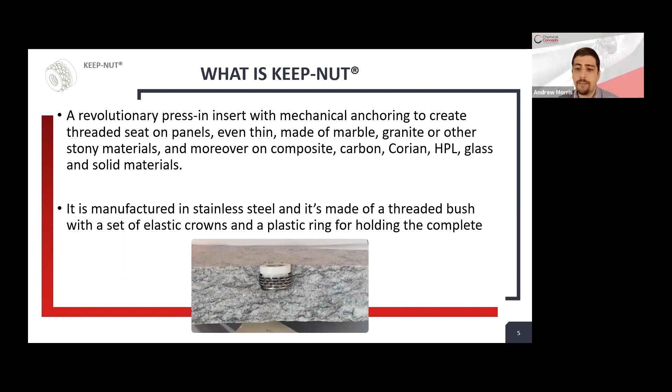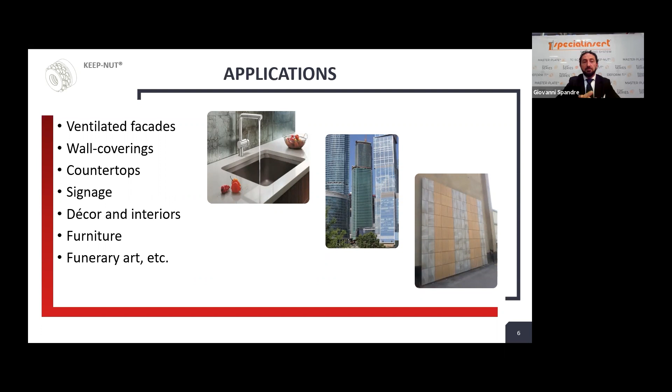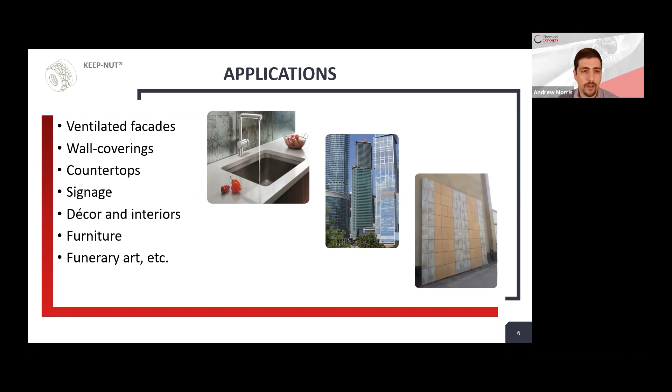Keep nuts are made of stainless steel and nylon, and come in a variety of sizes and configurations. They were designed to be used on porcelain and natural stone for ventilated facades, but some other common applications include vertical applications in wall coverings, signage, decor, and other interior parts and furniture. Tabletops are really common, as are armrests and other furniture parts. As you can see on the screen here, keep nuts work in a wide variety of materials.

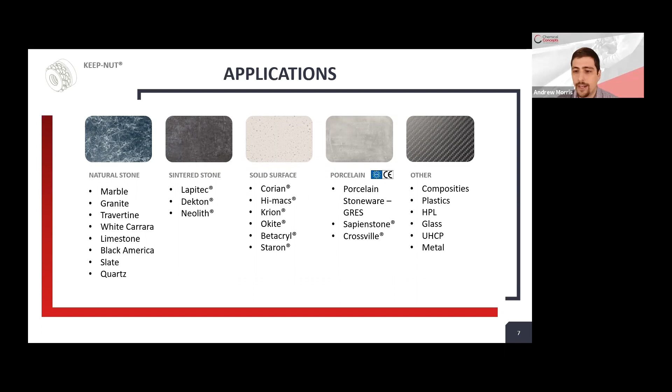The thing to keep in mind is that the keep nut is best suited for very hard and dense materials. I wouldn't recommend the keep nut for soft plastics such as cellular PVC or soft woods, but it works very well in natural stone, sintered materials, and porcelains. There are also other products such as composites, plastics, phenolic core products like Trespa, ultra high performance concrete, and even solid metal sheets if they're 8 millimeters thick or more.

So how do you install a keep nut? The first step is to drill a straight cylindrical hole using the correct size drill bit. Keep nuts come in different sizes, but the diameter of the hole is always consistent. You're looking for an 11.8 millimeter hole, and we'll talk about the drilling methods in a minute.

Next, you'll use a very simplistic hole testing tool. We call this the go, no-go gauge. You'll see this in the live demonstration as well, but one side says go, the other side says no-go. If the no-go side fits in the hole, then the hole came out too big. There are also depth markings on the side for the most commonly available sizes.

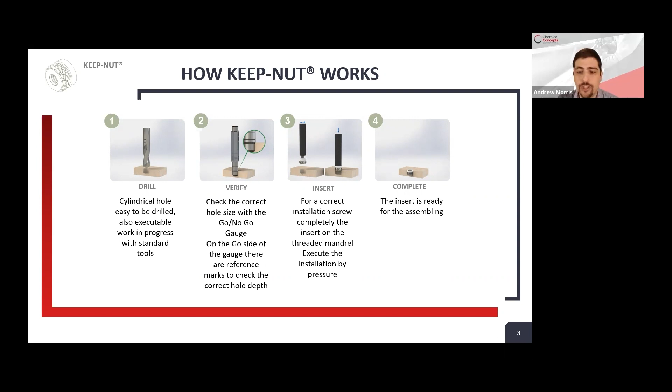Next, there's a setting tool, which is just a plastic rod with a threaded rod on the end. You simply thread the keep nut onto the tool and punch it into the hole with a rubber mallet. At this point, the insert is ready for use.

As for drilling methods, the keep nut works great with automated drilling methods, and that's usually preferred. If you're working with stone or masonry material that requires wet drilling, you can use a CNC router for stone. If you're using solid surface, HPL, or materials that fabricate more like wood, you can use CNC routers intended for wood and plastics. In this case, most often I see people using small router bits, say 1/4 inch, and then programming the machine to drill in a spiral to end up with a hole that's the correct depth and diameter.

With wet drilling, diamond bits are usually only designed to go up and down, so you want to use the correct size hole. We sell 11.8 millimeter drill bits, and they're relatively inexpensive, around $40 depending on what quantity you buy. You can get hundreds or even thousands of holes out of one bit depending on what material you're using and what your setup is.

If you're looking to use a manual tool, there are options as well. For solid surface, HPL, and other materials, you can simply use a lithium-ion drill with the correct size drill bit. We also have depth stops available, so you can drill repeatable holes very easily. If you're working with materials that require wet drilling, we have the KDM series drilling machines. These have a vacuum foot that holds the drill at a perfect 90 degrees. It can suction down to even the rough side of the stone, and it can drill a hole in granite in 10 to 15 seconds.

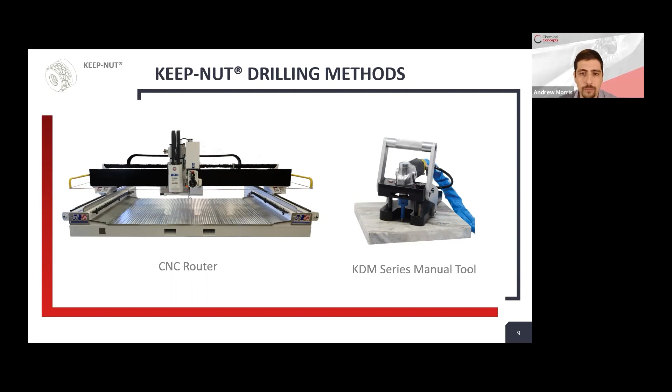So at this point, we're going to stop for a minute and show you this brief video, which I think will give you a better picture of what I've just described. So let's watch.

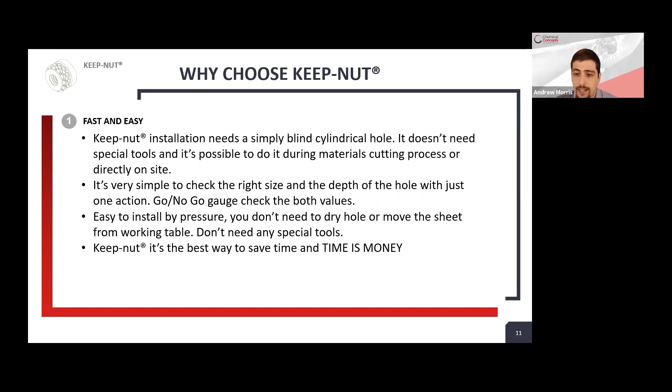We've had many of our biggest customers do their own cost studies, and in every case they come back and said that the time and labor savings were really significant.

The 2 crown is far and away the most popular size. This version is best suited for undermount sink applications, 12 millimeter materials and above.

Then you move up to the 4 crown types if you've got heavier duty applications. This is recommended for cladding or vertical surfaces where you have 2 cm or 3 cm granite, or if you need higher strength for softer materials such as soft marbles and high performance concrete, which is typically softer than stone materials.

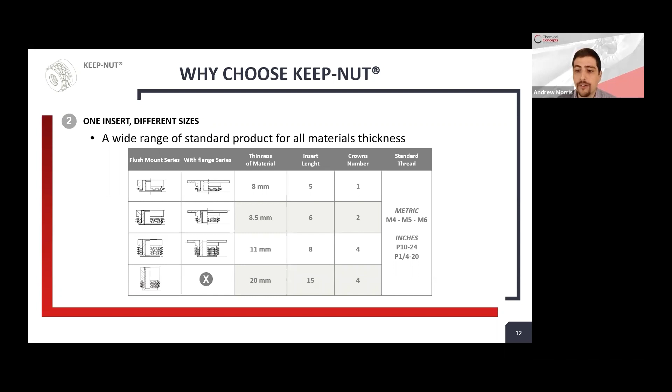In stone fabrication, it's not uncommon to do 3 cm granite on Monday, 2 cm marble on Tuesday, 12 millimeter porcelain on Wednesday, and 8 millimeter Dekton on Friday. So from a quality and process control standpoint, it's hard to have 5 different systems for 5 different materials. Here you can have 1 product and 1 process that works with a lot of different surfaces.

Next is safety and security. In Europe and many other countries that use the standard, the KeepNut has ETA and CE certification for porcelain. We also just received, which we're also very excited about, the test results for the ASTM standards for North America. This was performed by the lab at the Natural Stone Institute.

So we now have ASTM tests for different types of stones. We did a hard stone, a soft stone, a medium stone. You'll see those results in a couple slides. We have several porcelain materials, including Sapien Stone, and we're working with other surface manufacturers such as Cosentino and Lapitec and others in order to get even more test results on more materials.

The KeepNuts, as we mentioned, are stainless steel, so they're suitable for interior and exterior applications. They're also fireproof. The 1 plastic component is self-extinguishing, and once it's installed, it does not affect the performance or the strength of the fastener.

It's also a totally mechanical system, so there are no variables in terms of proper mixing of the adhesive or whether or not you get good adhesion or the adhesive performed correctly.

And lastly, the KeepNut is designed with a stop at the end, so it is not possible to over-thread the KeepNut. I've heard of issues with other systems that if you over-tighten the bolt can keep moving and you can actually crack the whole panel if the bolt goes too far.

With the KeepNut, the bolt will just spin if it's over-tightened, so this kind of failure is not possible.

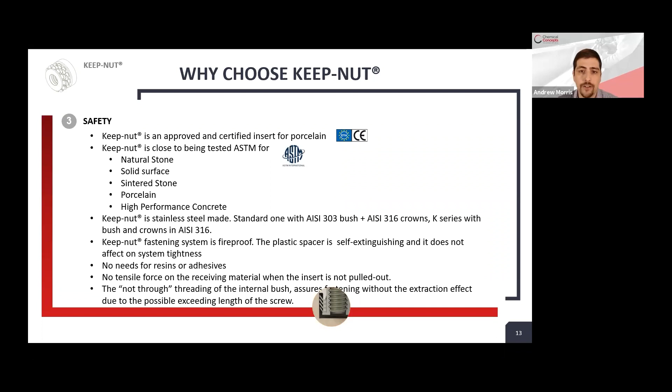The keep nut is also flexible and easy to work with after installation. When using the flush mount, there's nothing sticking out above the surface, which is great for storage and transportation. The fact that it's flush opens up possibilities for using any type of hardware or bracket.

Other anchors require a specialized bracket to accept the part of the anchor that stands off from the material. But with the keep nuts, whether it's hardware, a hinge, a bracket, or a clip, the possibilities are endless.

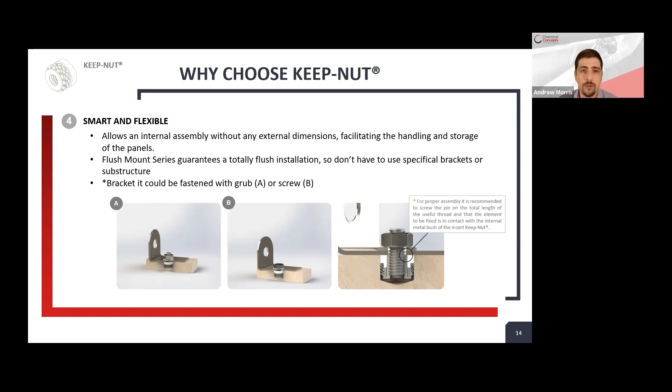This is why option A is usually recommended. You use a threaded rod, which can be whatever length you need, plus a separate hex nut. That way, you're guaranteed to use the entire usable length of the threads of the keep nut itself, and the hex nut can be adjusted to accommodate whatever thickness of hardware you're using. You don't need different screws for different thicknesses of hardware.

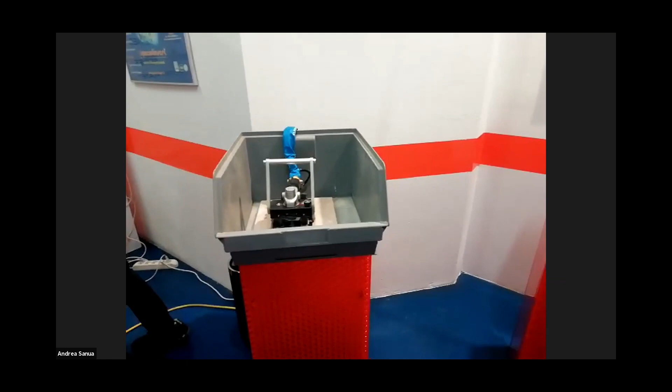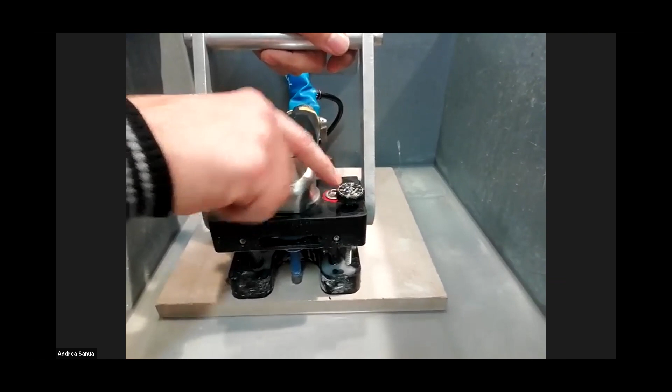Hello everybody again. Now we will do all the tests and steps needed to perfectly install a keep nut. The first step is drilling. We put the material under the drilling machine, and we have an adjustment to set the depth of the hole according to the keep nut model. Now we perform a simple cylindrical blind hole.

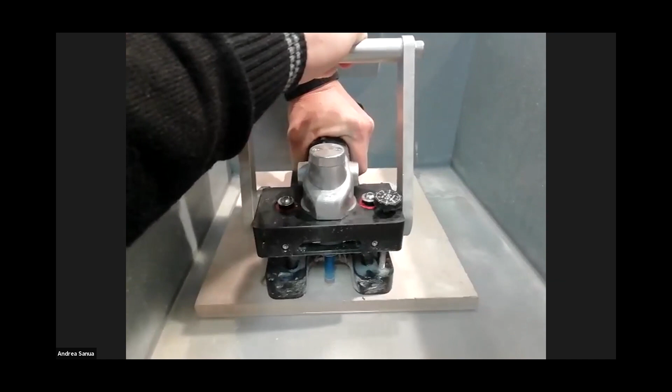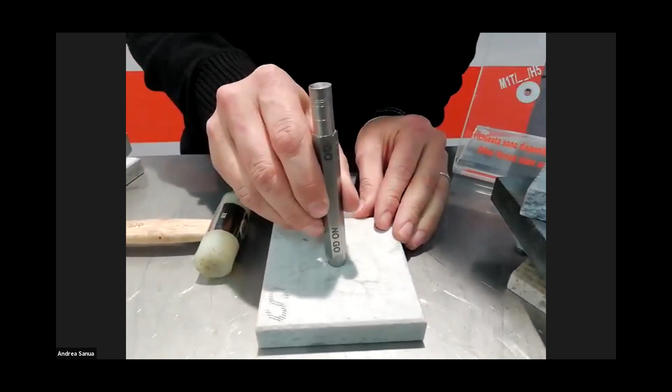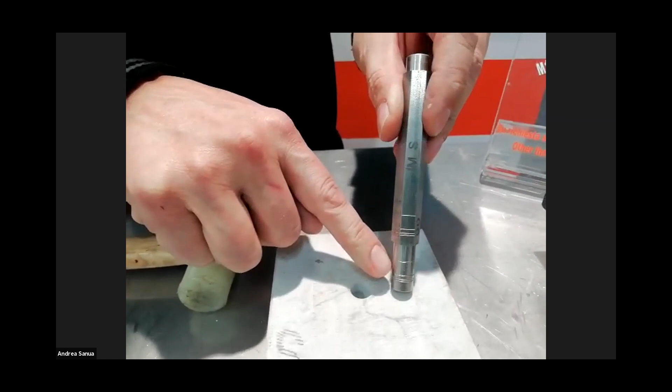Once the hole is done, we check it with the go, no-go gauge. First we put the no-go side and make sure it cannot enter the hole. Then we try the go side and check that it can go in up to the indicated level according to the keep nut model. In this case, it's the H8.5.

When everything is correct, we fix the keep nut under the punch and hammer it into the hole. That's all. Now the keep nut is installed and we can go fix it in our structure.

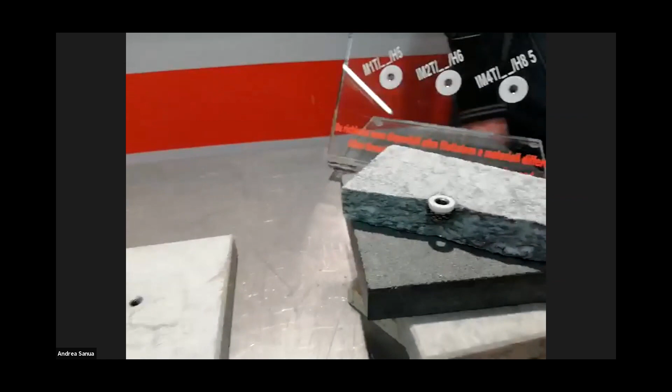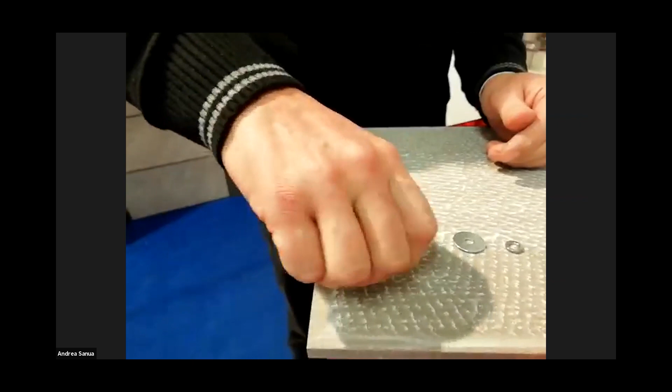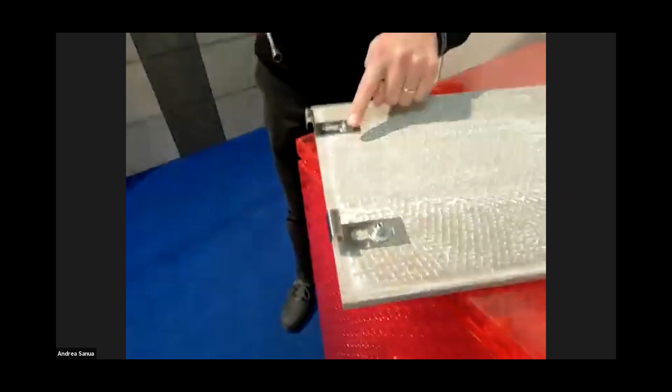In this case, it's a system for facade that we apply with the grub screw. We simply screw it in, put the washer and spacer, and the nut, and just tighten it. Our tile is ready for installation in the substructure, for instance of a cladding facade in this example.

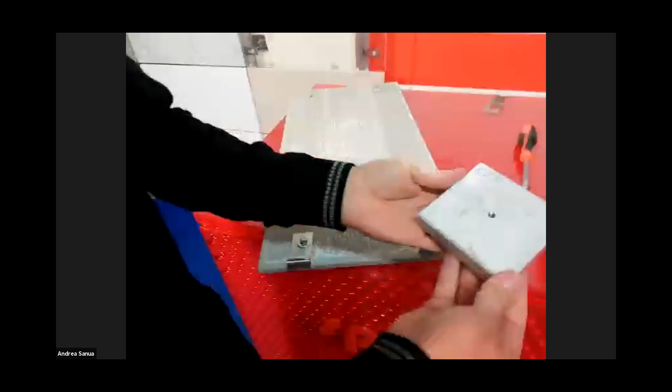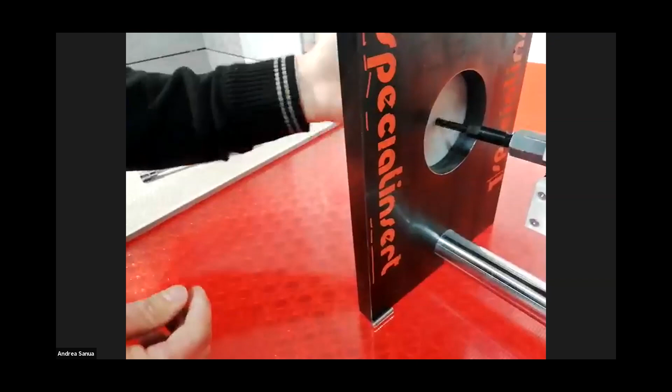And that's all, the work is done. Now we will perform a pull-out test on a sample of keep nut installed in marble. We fix it in the pull-out test machine. Please be aware that the result is displayed in kilogram force, which is equivalent to 2.2 pounds.

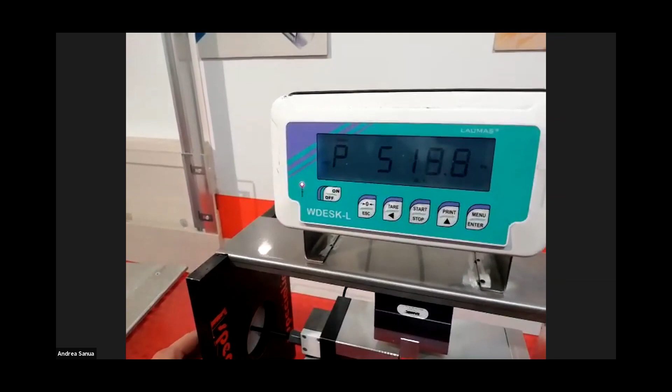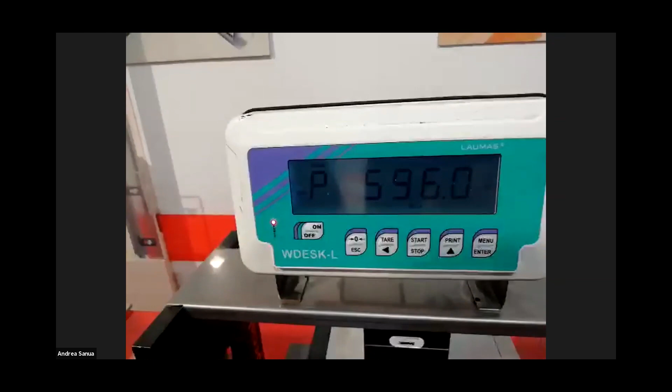It goes closer to 600 kilos. Wow, that's pretty good. We can say the result is definitely appreciable.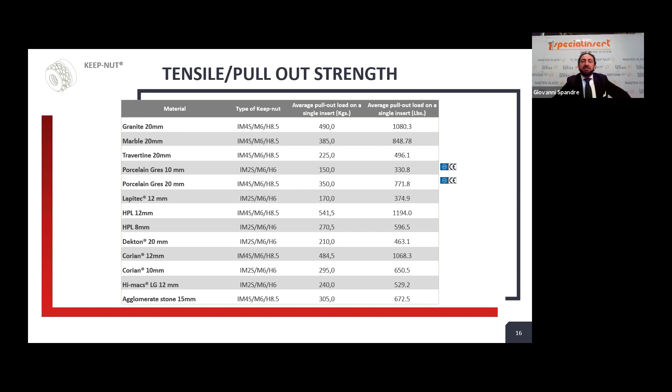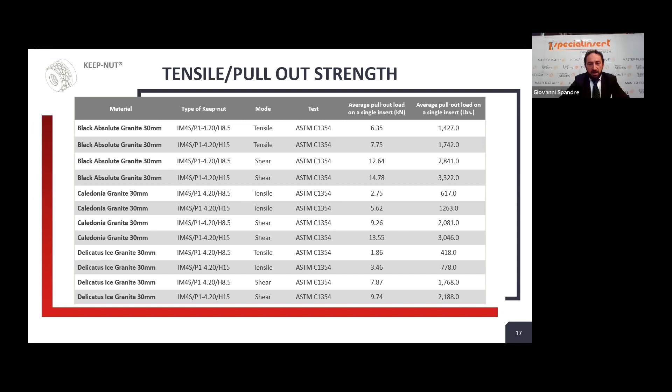In the next slide, we have the same kind of results obtained at the National Stone Institute attending the test for the ASTM. As you can see, you have the tensile and shear test results according to the ASTM test. You can evaluate it because you'll receive this presentation after the meeting, so you can see all the values for every different material.

So let's talk now about the competitor analysis. Talking about fixing systems in a mechanical way in stony material, our competitors are all working with undercut.

Undercut means you have to make a very complex drilling process. You need specific drilling tools. You need specific check tools that in most cases are very tricky to use. And you have to install the fastener before shipping the tiles to the workplace, because they're also working with an external dimension that can give you many difficulties during packaging, especially if you have to ship it very far from your workshop.

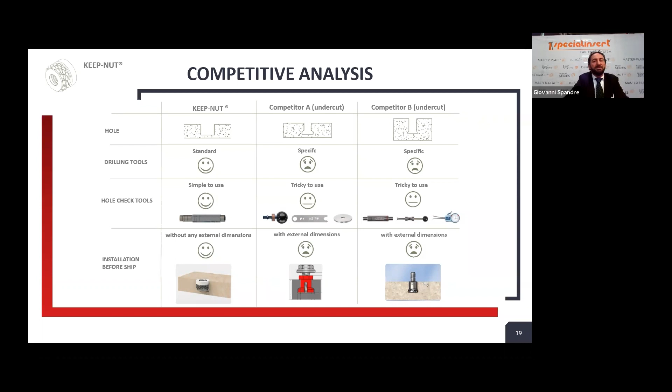Talking about the undercut process, first of all we have the need of a specific drilling machine with an eccentrical rotative axle. Then you have a very expensive drill bit that costs 6 to 10 times more than a standard cylindrical diamond drill bit. Then the drilling time is very long, on average twice as long as a standard cylindrical hole.

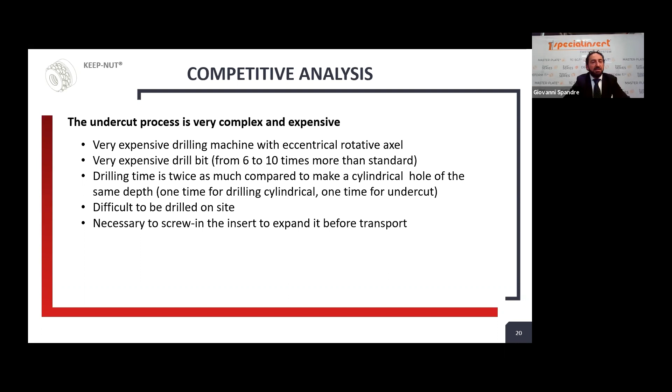It's also very difficult to do this process on site directly, and it's necessary to screw those inserts before the shipment of the parts. Otherwise, if you just insert them, they get loose during the transportation process.

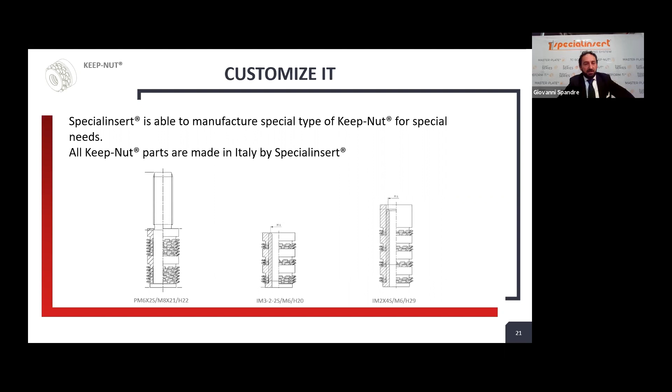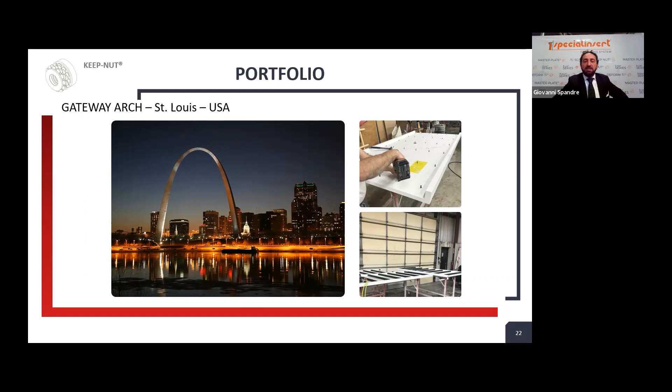Now we just want to give you a short overview of a portfolio of the most significant applications we have made recently, to give you a rough idea of how our product is used and appreciated in this industry. The first one is the Gateway Arch in St. Louis, United States, where during the renewal of this important monument, the cladding was done thanks to our Keep-Nut.

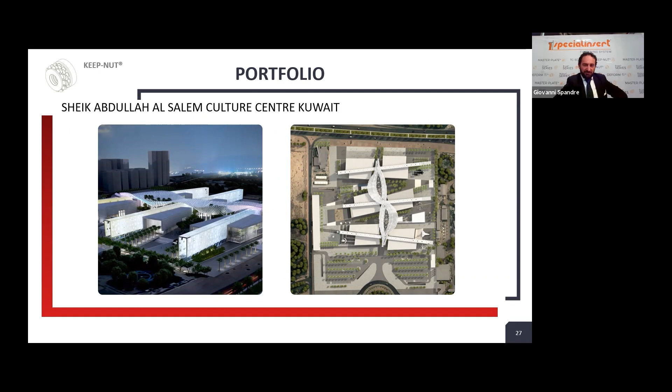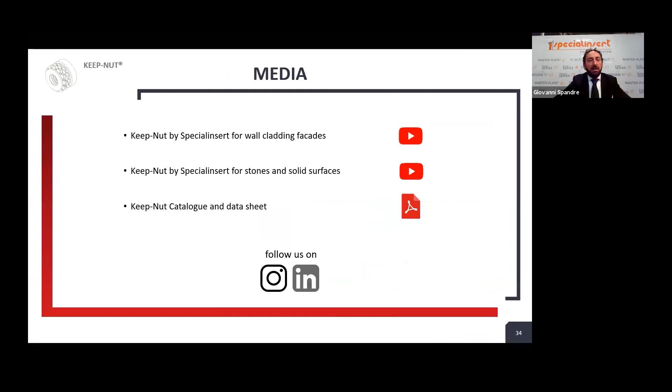ETA certification. That means European certification offices have made all the possible tests on our keep nuts on those materials. If they use the IM for instance, 2S, M6, H6 on half inches, they will absolutely have no problem, and it will not create any kind of tension inside the material. If those people are interested, we can send them the ETA certification where all is explained in detail about it.

Yeah, and I know we have some people from Porcelanosa on this call. So obviously, every manufacturer is going to have their own recommendations on what they do with their material. We'd be happy to discuss with any of their technical people whether there's any modification that is possible for their technical recommendations and whatever.

But we'd be happy to do whatever testing is needed to satisfy everybody. I just want to point out that I can't speak to Porcelanosa's product in particular, but we have done quite a lot of testing on 12 millimeter porcelain products. I want to bring up this picture here. This is actually 12 millimeter porcelain, and we did this at a workshop in Nashville, and you can see two people standing in the sinks. Each of those sinks is only supported by 4 keep nuts. We didn't have time before constructing this to even add silicone, so there's no sealant of any kind. It's just the anchors are the only thing.

I know someone might look at that and say the silicone sealant does 90% of the work anyway, but there's no silicone in this joint, and it held up fine. So I would say 12 millimeter porcelain in general is a great application, and we haven't had any issues to speak of with parts cracking or breaking.

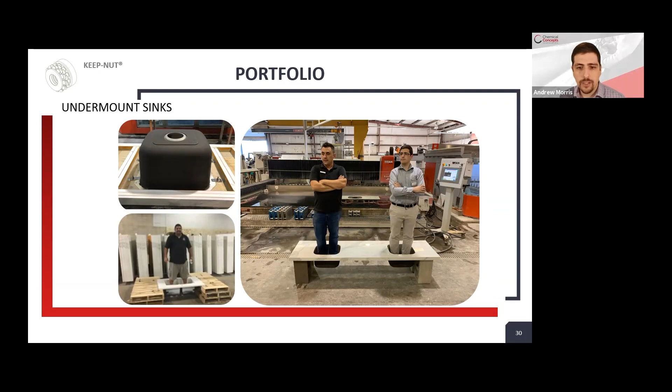Was that in here? We do. I'll see if I can navigate to that slide. There's more than what I have on the tip of my fingertips, but these are the numbers we just got from the Natural Stone Institute. Let me find those testing numbers. We've done many more tests on porcelain materials, but this is what I have in this presentation. So here's 12 millimeter porcelain: in shear we have 1,670 pounds shear strength on average, and in tensile we have 614 pounds for 12 millimeter porcelain.

We have some other porcelains we've tested, and we also have the ETA certification. The full report has testing on tensile, shear, and a combination of tensile and shear, so we've got additional porcelain numbers. I'll see if I can put our friends in Italy on the spot - I don't know what other information they have handy. Giovanni, do you have any additional numbers handy on 12 millimeter porcelain?

No, these numbers are more than correct. Yes, so that should give you an idea. And if there are any more tests you'd like, feel free to email us - we can send additional test reports if there's more data you'd like to see.

Sorry Andrew, if you can stay on this slide, we can directly answer the next question from our friend John Grossworth, who's asking about the results on UHPC. As you can see, the last four values on this slide are specifically for UHPC 15 millimeter and 19 millimeter, with the corresponding tensile and shear values.

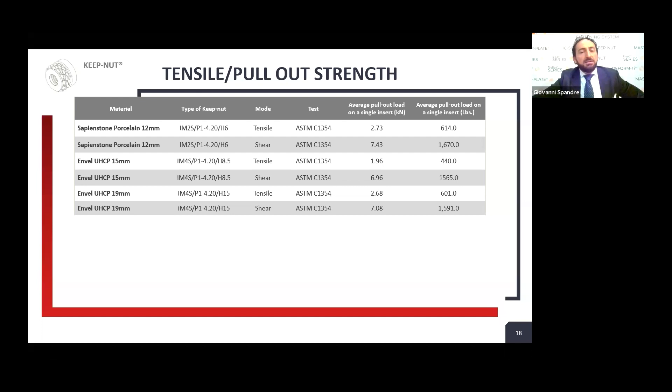The only thing I'd add is that UHPC is typically a bit softer than stone or porcelain. So to get those values, you normally have to go up to the next size keep nut than we'd normally recommend for stone, because the harder the material, basically the higher pullout strength we get.

So if you look at the granite, for instance, I was really just shocked - we just got these numbers earlier this week. For those of you who are granite and solid surface fabricators, it probably comes as no surprise how much harder black absolute granite is compared to other types of granite. Here on the black absolute with the 15 millimeter keep nut, we got 3,300 pounds in shear - the biggest number I've seen for anything with the keep nut, at least with that size.

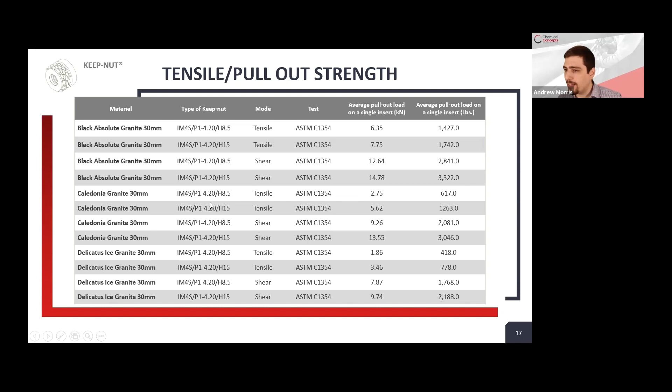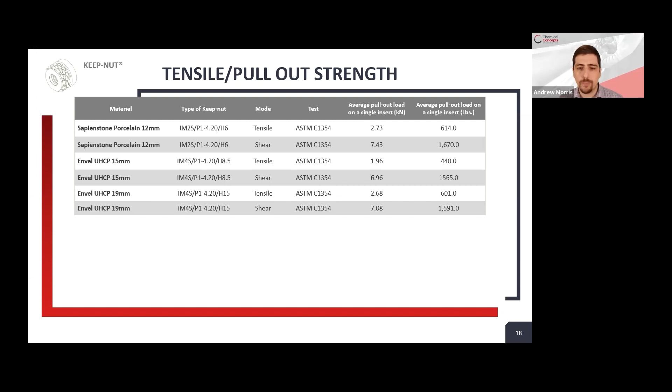So with harder materials the numbers go up, and on softer stones the numbers go down a bit. On a UHPC product I'd typically start with the 4 crown with either the 8.5 millimeter or 15 millimeter, whereas with stone or a harder material you could probably go with the 2 crown, which is our most popular. Great question.

Got a great question here from Prakash - he's asking, can we reuse the keep nut if the stone is broken or for some other reason?

No, we wouldn't recommend reusing a keep nut. Those crowns get deformed as they're inserted into the stone. Depending on what you're doing, if it's furniture, maybe the risk is low, but if it's something vertical, for whatever it costs for one keep nut, I think you'd be better off using a new one rather than risk something coming apart and falling on you. Any money you'd save by trying to reuse a keep nut, you'd probably lose in lost sleep or having to go back and fix something. So I would certainly recommend a new keep nut for any hole that you try and drill.

Thanks, Andrew. Another question here from Kurt. He asks, is there any values we have for tensile or shear when installed in steel? Yes, we have done applications on steel, on carbon fiber, on fiber resin, many different materials. Steel is very general—it depends what is meant by steel. If it's mild steel, if it's a tube, if it's drilled by machinery, if it's stainless steel, we can have a big variety of different results. If you address us with the specifics of the application, we will perform a test for you and give you the results so you can evaluate the exact performance you can obtain.

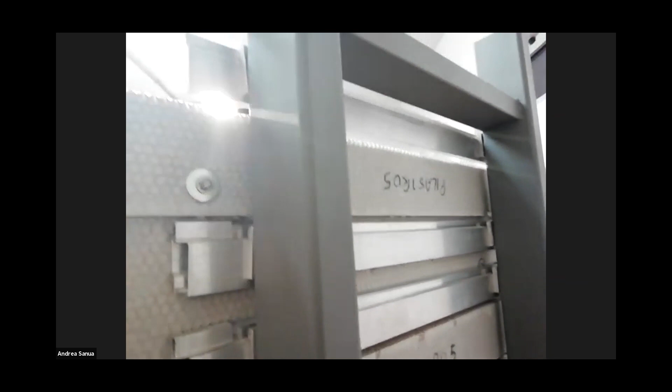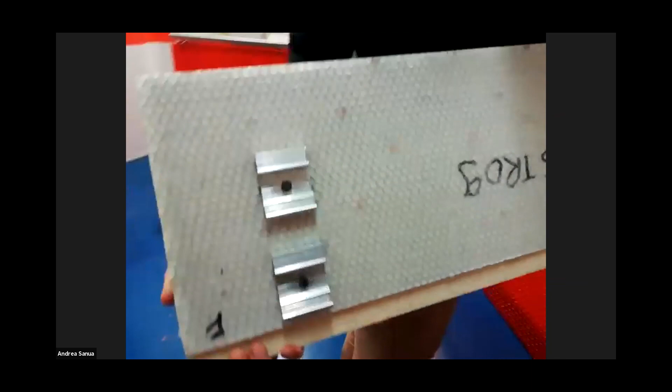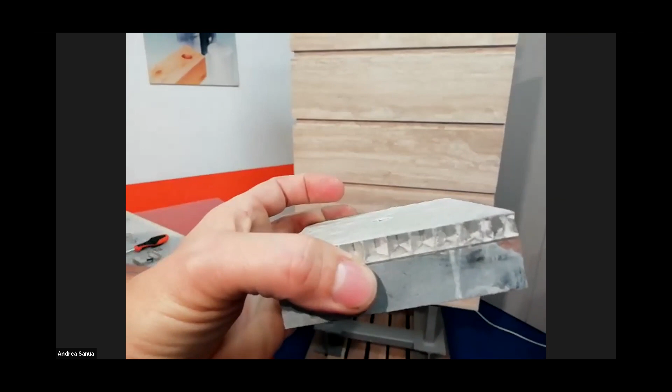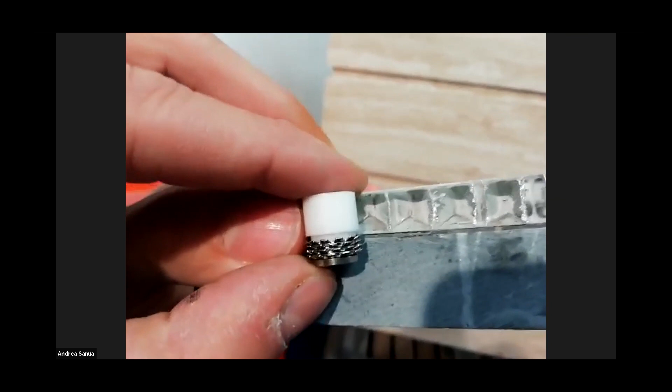We have two different kinds of facade substructures produced by a customer of ours. One is done with a vertical structure—when you fix it, as you can see from this Lexan panel, you can see through how the fastening is made to the main rail. On the other side we can see a horizontal version, made with a horizontal rail, with a different kind of fastening to the rail. This is a lightweight stone with honeycomb on the back, but fixed with a keep nut as well—we have a keep nut according to this thickness that goes through the honeycomb and anchors in the stone. So we have two solutions there. In this example, some local regulations require the mechanical fastener to go into the stone, so even though there's a honeycomb backer, they still want to be able to go into the stone. You can see how it looks if you look at the section of this application.

If you're using lightweight stone panels that have honeycomb in the back, the stone is very thin and you couldn't use a keep nut. In that case, we have the deform nut, which anchors into the honeycomb itself. So correctly, two options for you depending on your application.

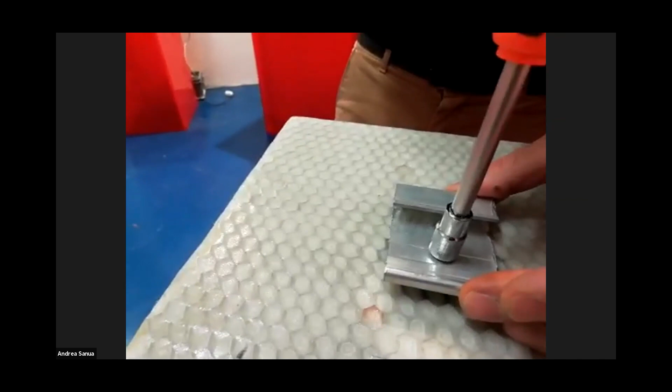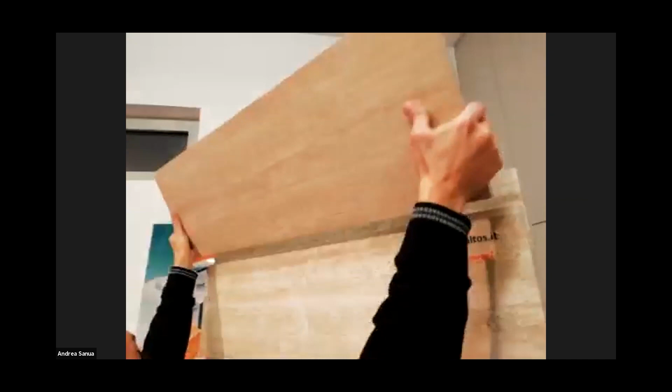Here you can see how the clips are actually installed. Some anchor manufacturers will have specialized clips that have to be used with their system. Once you have that female thread on the panel, you can use any clip or piece of hardware you want. So if there's a particular manufacturer of clips and rails that you like to use, our system is open to accept every kind of substructure. We have no problem with that.

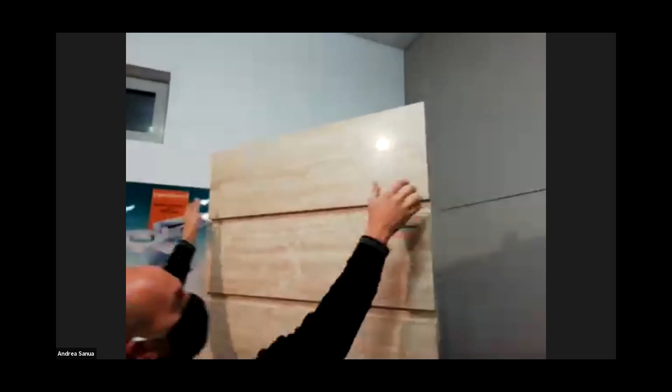Yep, and that was a great example of how they're installed. They're usually extruded metal, designed to fit right onto each other to make it very easy to remove panels. A lot of people that do facades, if they're not used to undercut anchors, might be used to anchors that go into the side of the stone, called kerf anchors. With those, if a panel breaks in the middle, you can't replace it. Whereas if you go with a back anchor like this, you can remove one panel if possible.

Sorry Andrew, to interrupt, no, just to show that the side of the facade in the corner is made of porcelain. Our friend before was asking about keep nut in porcelain. You can see from this style a typical application made on porcelain tile.

Great, thank you, Andrea, for that question. I got a couple questions here. It looks like G is asking how customers can calculate the number of keep nuts required depending on the application.

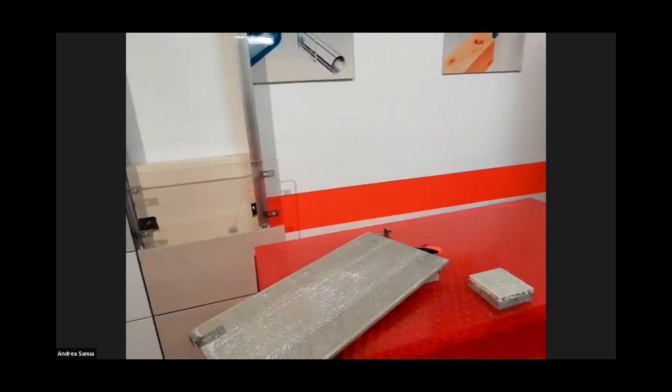Well, I'll take a stab at that. We always encourage, while we can give you a lot of support on how to use the keep nut and talk to you about your process, we generally like to see engineers being involved in projects. In the projects I've worked on, typically the engineer makes the recommendation. I'll shout out to Pico Engineering, I don't know if anyone from there is on this call, but we've done several projects with them, and they specialize in stone projects here in Canada and North America. There are lots of other engineering firms out there too, that one just jumped to mind. But we can point you in the right direction of other people if you need a good engineer. Typically we'd defer to them since you need their signature, and from a liability standpoint it's best to have the engineer make those determinations.

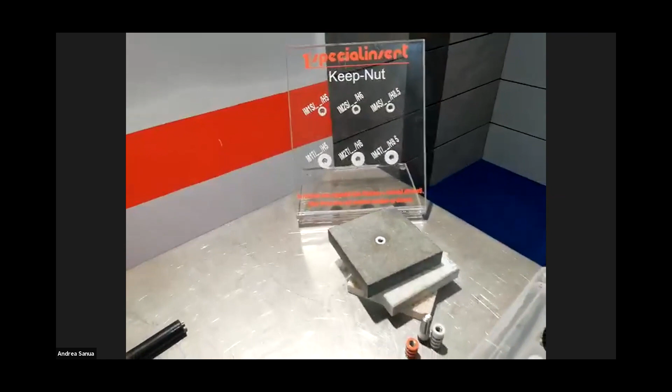But what I can tell you is what's typical. For a typical size panel, you might see, and Giovanni can maybe help me here, between 4 and 8, depending on the size of the panel. If it's a typical size panel, would you agree with that?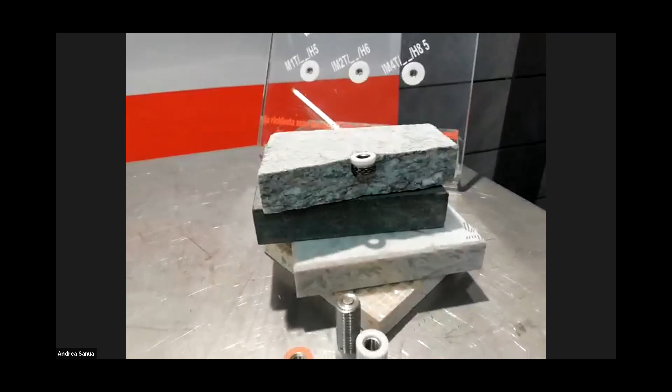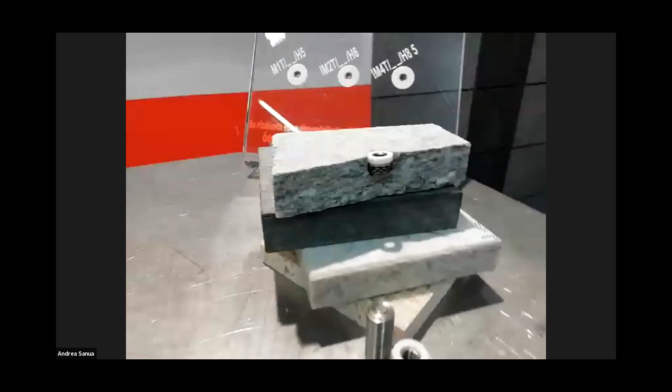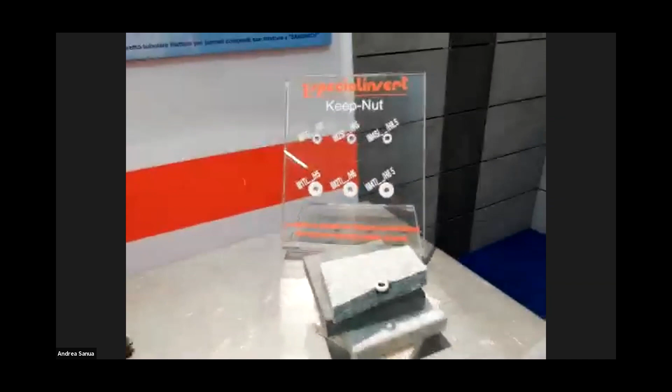We get a guideline shown on our ETA certification that gives a suggested distance between the keep nuts. But as you correctly said before, it depends on the complete project, because factors like flexibility of the material, kind of substrate, or many other variations independent from our fixing system can influence the result. So the best solution, as Andrew says, is always to have an evaluation from an engineer who can sign off on this decision.

Correct, and that protects everybody. That protects you guys, and that protects us.

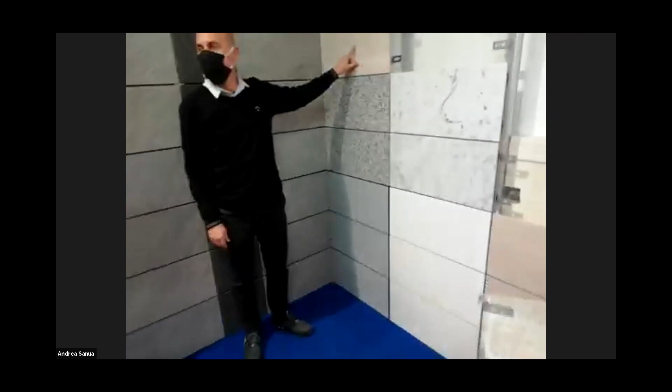So just one more thing that could be interesting. We are talking about different materials. We want to show you the materials we have placed in this demo. This is travertine, granite, HPL, Corian, marble, Dekton, and this is Lexan, just to allow us to see through the fastening system. All the gray facade is made of porcelain glass.

Yeah, although that Lexan one is just for demonstration purposes. I mentioned the sign industry, we've had a lot of people do some interesting things anchoring directly into acrylic or polycarbonate. The keep nut fits perfectly in the Lexan, and it works very, very good.

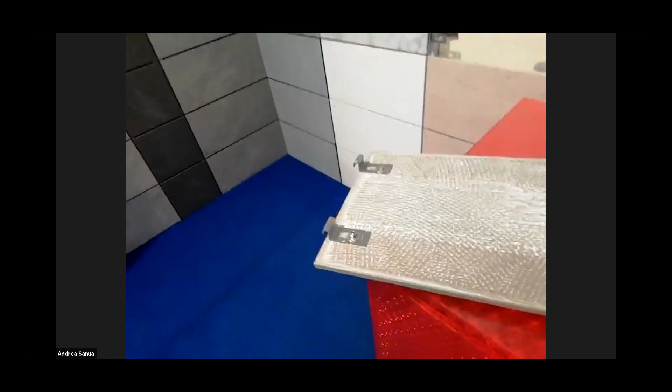Got any more questions, John? Yeah, I wanted to add here, Giovanni was throwing the subject. We have a question here, and maybe we can help you out, Floyd, on the grid systems that you're showing with the panels there. What do you think?

Yes, of course, we can send all the information about that in a separate email. Yes, no problem, it will be a pleasure for us to give the information.

Great, I got a nice question here from Justin. Is there a risk of corrosion if installed in an area with lots of humidity or standing water?

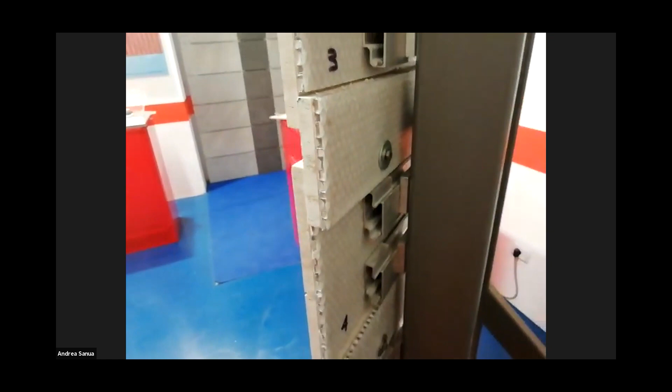No, thanks to the fact that the keep nut is made of stainless steel, and especially the key version is made of AISI 316, which is A4 in other standards, the material used for the naval industry. It's absolutely not influenced by oxidation when standing in salt water. So it doesn't have any effect on the keep nut.

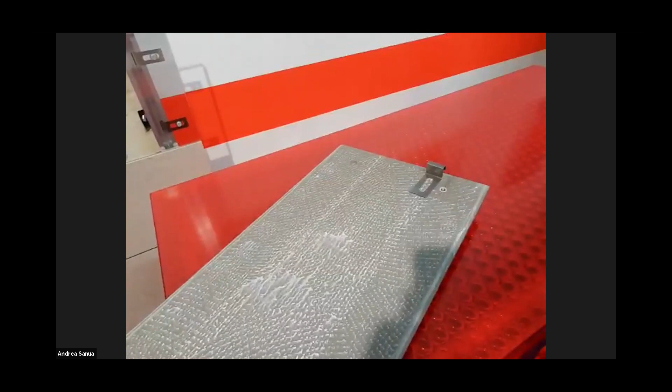Yeah, and we didn't show that video, but going back to the sink application, that's one of the things people really like about it. We've got another video, and you'll see a link to our YouTube channel where we've got a lot of videos, one of them showing the drilling on stone.

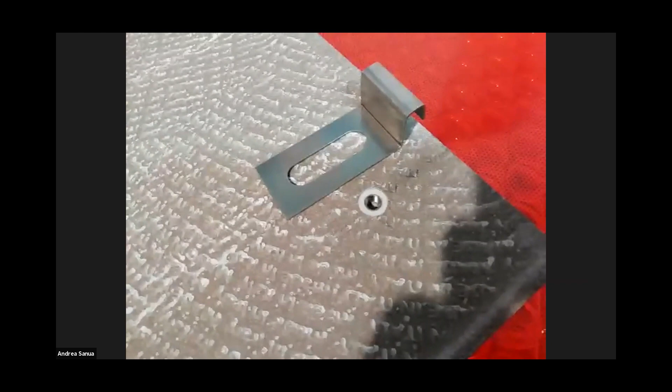What they have is the CNC drills the holes, and then the operator just comes in before even removing the material and inserts right into the wet stone that's just been drilled. That's very time-saving and a convenient process for them, and they don't have to worry about drying out the stone. It eliminated a lot of steps for that particular customer.

Thanks, guys. Here's another facade or paneling question from Jorge. Can damaged panels be individually removed and easily replaced?

Yeah, it depends on the kind of substructure you are using. The one that we show over there, yes, you can remove a single panel, because each one is installed independent from the other. So in this way, you don't have to move the line up or down or the whole column, but you can work directly on the single panel to change it if you need it.

Any other questions? I got another one here. This was asking how many anchors, and we can help you out on this directly. He's just describing, he's got a slab at a certain size and thickness and looking for the keep nuts.

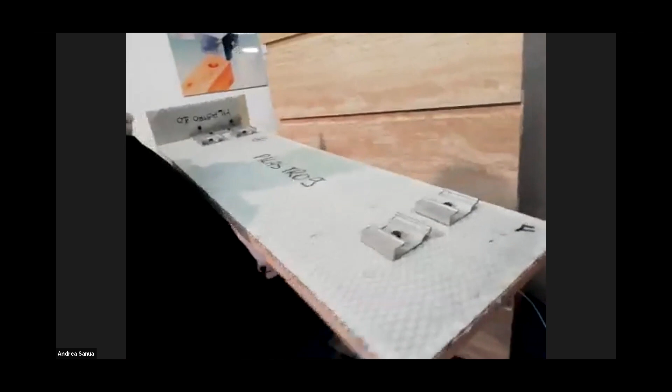So if you evaluate this question with the table we showed before about the results, you see that 300 kilos can be handled by only one keep nut. In spite of the fact that this is a slab, we minimum fix 4. So we have a safety factor of 4. And the question about weight is resolved.

What's counting, and what an engineer's calculation covers, is the effect of wind, pressure, or things like that, which can generate force completely different from the weight. So it's once more important, if you are making an external facade, to have the consultancy of an engineer able to evaluate all these possible effects.

If you are working instead on an internal facade like a boiserie, you have no problem at all, because this weight can easily be handled by 4 keep nuts.